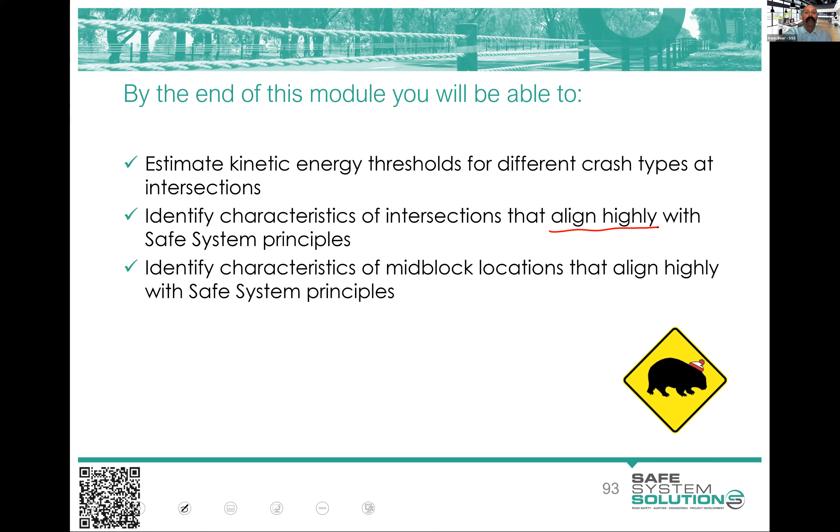Now there's a little term I'm using here which I want to touch on before we keep going. You'll notice I talk about aligns highly with safe system principles. I don't say is safe system or is not safe system. The reason for that is the safe system is sort of a spectrum, really - highly aligned with safe system principles, or very much not so well aligned. The reason for that is you will see as you do an assessment that things can be really pretty well aligned, but they're not perfect.

One of the big issues I've had over my time here is this initial entry of the safe system. People were talking about it like a binary thing. They would say, oh, we can't do that project, it's not safe system. And people would be like, well, yes it is. No, it's not. And then we had these debates. What we were sort of at was that it was something that was very well aligned with safe system principles but could be a little bit better, and then there was this debate, but they were talking about it as not safe system and safe system. And then we had people coming out with all sorts of things - we will only do safe system projects - and it was kind of slightly meaningless.

I definitely jumped onto taking advantage of this confusion a little bit when I left the Victorian Road Authority and started up Safe System Solutions, because of this desire to find these safe system solutions as such. A better, more accurate company name would have been highly aligned safe system features, but it doesn't sort of roll off the tongue as well. But anyway, I just thought I'd point that out.

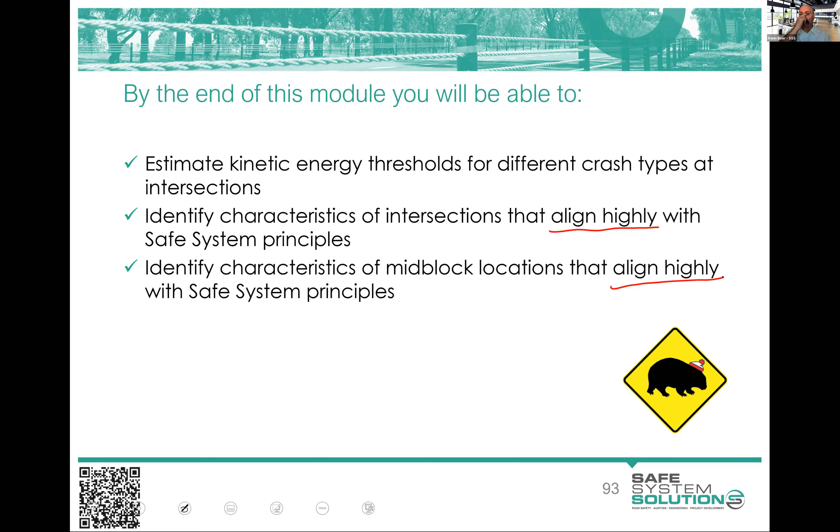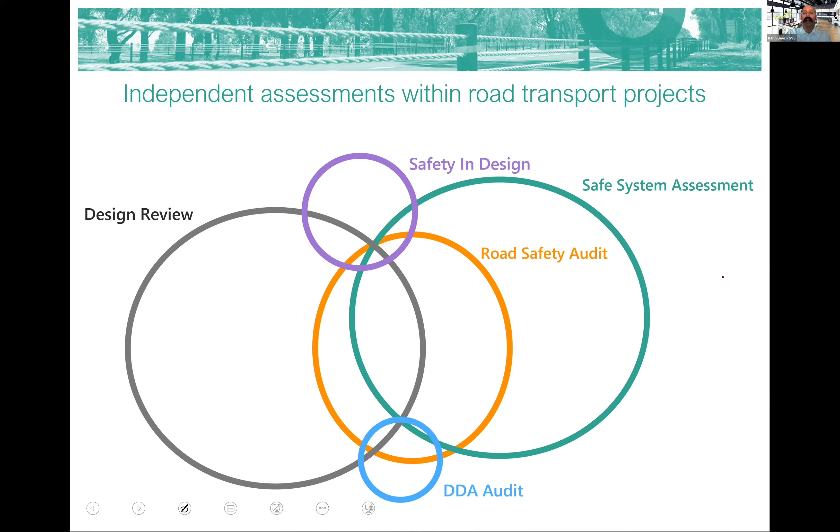We talked last time about the road safety audit, the design review, that independent design review, the safe system assessments, and the Safety In Design and DDA. So I won't go through that again, just to say that any of you that are currently road safety auditors, or you've done that sort of training, you'll be covering off some stuff you'll be quite comfortable with. But there are definitely things that are outside of that.

But let's start with intersections. Now intersections, obviously - well, maybe not obviously - intersections are a very direct point on the road network where risk spikes. And that's because obviously you've got conflict points, so you've got the ability for those crashes to happen. There's a few other little things that increase risk at intersections.

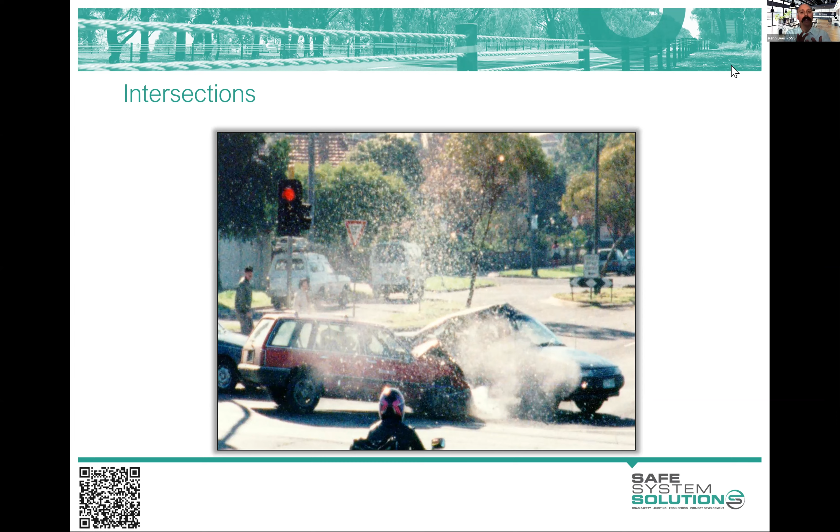There's often a lot of fixed hazards around intersections, which we don't think about too much. And often we're trying to - those are bottlenecks in the traffic flow - and so we're trying to widen and push as much through as possible in these locations, which means often space is compromised for potentially other road users apart from vehicles, or even vehicles themselves. So pedestrians, cyclists, motorcyclists can sometimes be slightly compromised in these situations.

Monash University Accident Research Centre in 2010, as part of the baseline research work they were doing on intersections, came up with these initial principles for intersection design. Some of that's fairly common sense, or some people think a little bit out of their control, but let's have a look at these.

The first thing they're saying is, can we get fewer vehicles? It's a slightly different take on the way we look at road safety, but very legitimate. That would change the exposure to crashes, because there's fewer people exposed, be that pedestrians exposed to fewer crashes from vehicles or vehicle-to-vehicle crashes. Fewer intersections, again, changes the exposure there - we're lessening the exposure to crashes because there's fewer actual conflict points out there.

Now, you may be saying, well, if you make it fewer intersections, people still need to get out and get to where they're going. So maybe we're just pushing all of that traffic to another intersection. And that's absolutely the case often. But if you can be pushing it to a safer intersection, that's a very good thing.

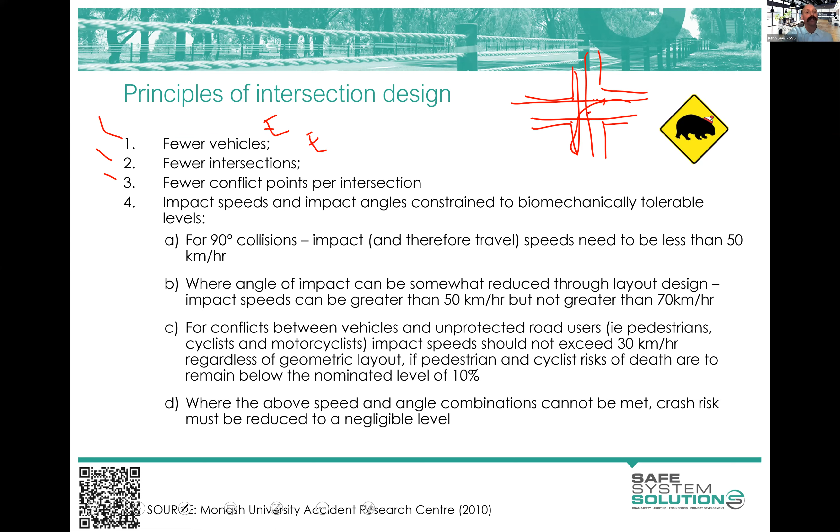Once you've gone through that, then you're starting to look at what are the impact speeds and angles and the biomechanical tolerable levels, which we've been talking about last module, and are we meeting these thresholds? So for vehicle-to-vehicle crashes at 90 degrees, are we at 50 kilometers per hour or less? So are these right angle crashes going to happen at less than 50 kilometers an hour? Where you can get a bit more angle on that crash, it can sort of go up a bit.

Now, the reasons for that are twofold. If you can crash at a bit of this angle, it's more of a bouncing off type thing - a bit of old vectors from physics, but you sort of bounce off. Your energy is dissipated into the environment rather than directly into that other vehicle. And likewise, if you can move it to a bit more head-on in terms of the angle, then you're engaging some of those frontal vehicle features that we know are quite powerful in terms of airbags, seat belts, crumple zones, the front of the vehicle. So if you can do that, we're somewhere between 50 to 70, maybe around the 60 kilometer an hour mark - within just on our borders of tolerable levels.

So pedestrians, cyclists and motorcyclists, we really can't be going above 30 kilometers per hour. That's our threshold speed. Often we want to see vehicle speeds lower than that, but we have that as a benchmark threshold speed.

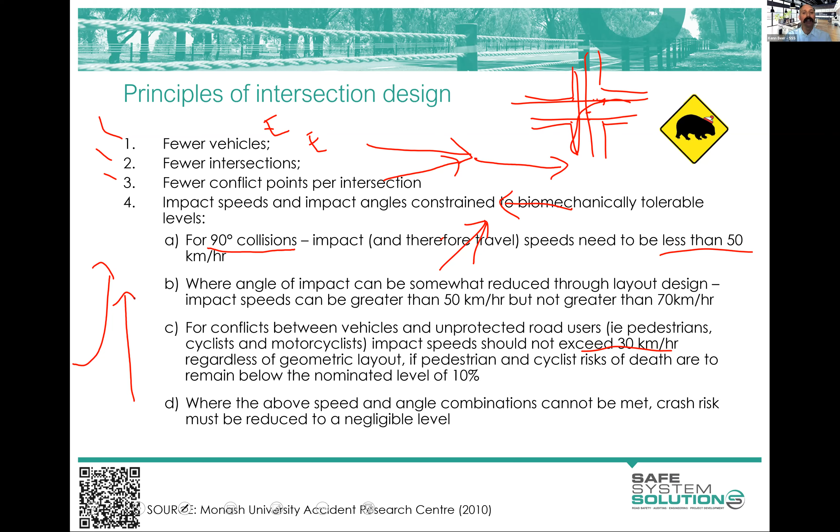And that's how on-ramps on freeways work. So the initial crashes on on-ramps on freeways are very safe crashes because the energy transfer to the human is so low. Yes, you need to think about secondary crashes, where they're going to go after that, any rear end crashes that result after people slow down and stop and the like. But in terms of that initial crash, that's quite within tolerable levels.

And so I have lots of these different diagrams, tables and things that pop up just to keep you calibrated in terms of what's survivable generally and what's not survivable generally for different crash types. And there are some tools and models available.

One of them is KEMM or KEMM-X, which is the kinetic energy management model. This is a particular bit of software that you could use to analyze an intersection in minute detail about the forces, the kinetic energy, the vehicles, the masses and the like. This is far beyond what you would need to do in a safe system assessment - it's so detailed, you don't need to go into that. You just generally have a look at the speeds, the angles crashes can happen, the mass of the vehicles going through, and you make a judgment call within a safe system assessment based on that information.

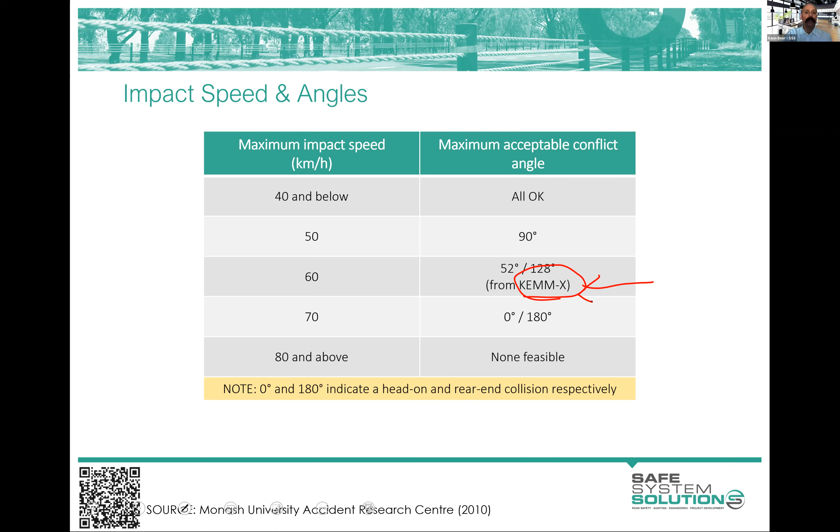You could be precise about getting the angles of crashes that could happen if you wanted, or you could just have a general feel for it and say, okay, we've got vehicles coming out here. That's about a 90-degree crash, and there's more angle on that one, so that's somewhere in between. I know the 90-degree one, about 50 kilometers an hour is the threshold. The other side of the road, probably about 60, because if they crash as they're turning out, that's a much more friendly crash, and you're starting to get a bit of a feel for it.

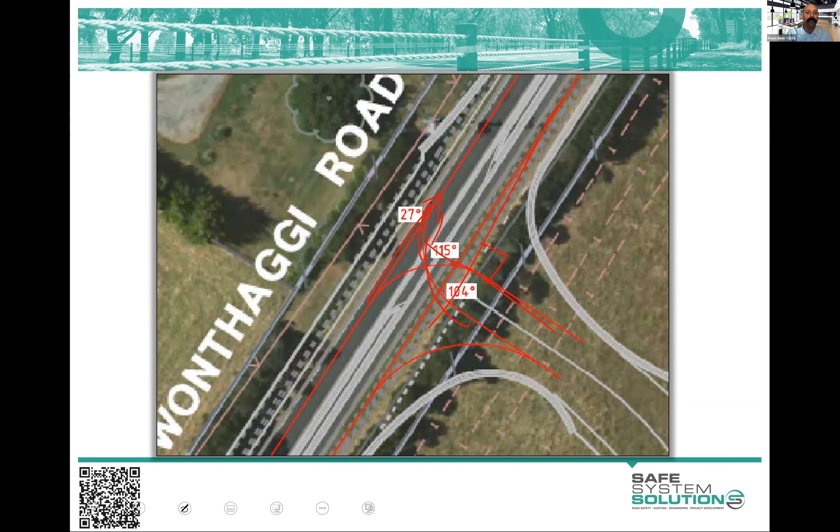The secondary crash risk that I mentioned is also important. When vehicles crash at an intersection, the mass of vehicles will move, obviously, the physics of it. But you also have vehicles that come in and maybe clip the front of the vehicle and spin off, clip the back of the vehicle and spin off, or avoid the vehicle that's pulled out and leave the road.

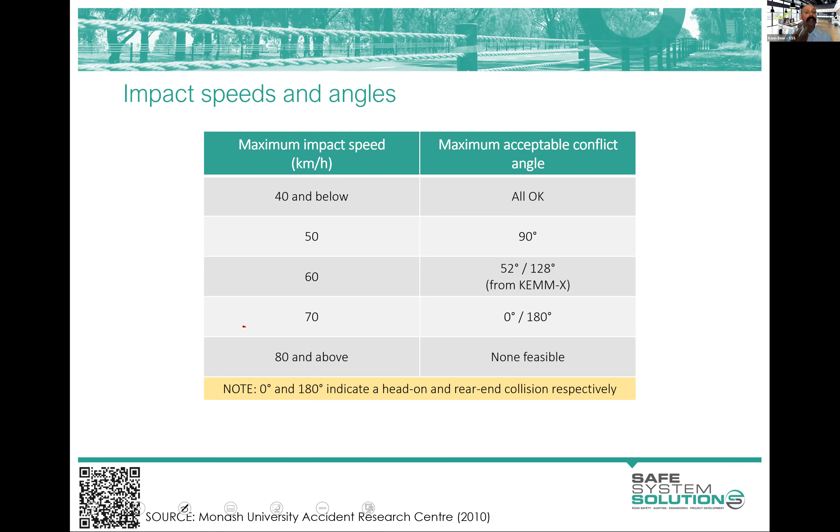So do start thinking back to these. For vehicle-to-vehicle impacts, 40 is all okay, 50 is fine, 90 is our sort of absolute limit with more angle on it. You can go up to the 60. 70 is really our rear ends and head-on direct crashes. It's very hard to run anything above 80 if that's the change in speed.

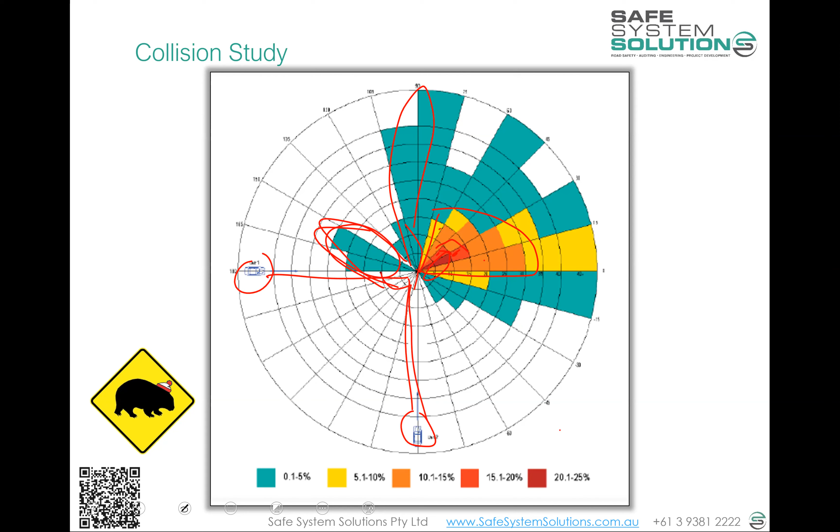If that makes sense. On that, when you realign the axes of the vehicles crashing - so like these ones, for example, they would be somehow... this vehicle's clipped off and run that way, or avoided out that way and struck there.

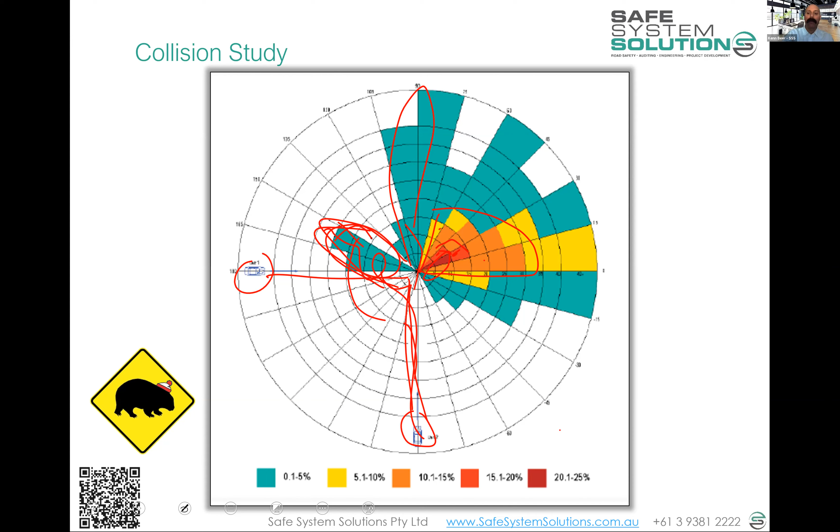Any other questions? No, not at the moment. Thank you, keep them coming in. Don't count the wombat again. Oops, oopsies. Oh yeah, okay, so if we go back to a slide, yeah, don't count it again. Just count the original time we get there. Uh-oh, what have I done now?

Okay, let's keep going. Well, actually, let's get you doing something for a Friday morning/afternoon, depending on where you are. I'm going to give you a little exercise to do here, and it's all about redesigning an intersection to get higher alignment with safe system principles. And this is our intersection. Let me give you a bit of background info about it.

This is a major arterial highway. It carries 20,000... oh, lost it, sorry, bear with me. What the hell did I do that for? Okay.

Okay, 20,000 vehicles a day, and at 10% commercial vehicles, so quite an arterial road happening there. We've got a side road here, and it has 1,200 vehicles a day, so lower, and it just takes the rubbish trucks. It does have occasional buses going down there because there's a school down the road here, about 400 meters down the road. There's a bus stop here because this is a bus route as well.

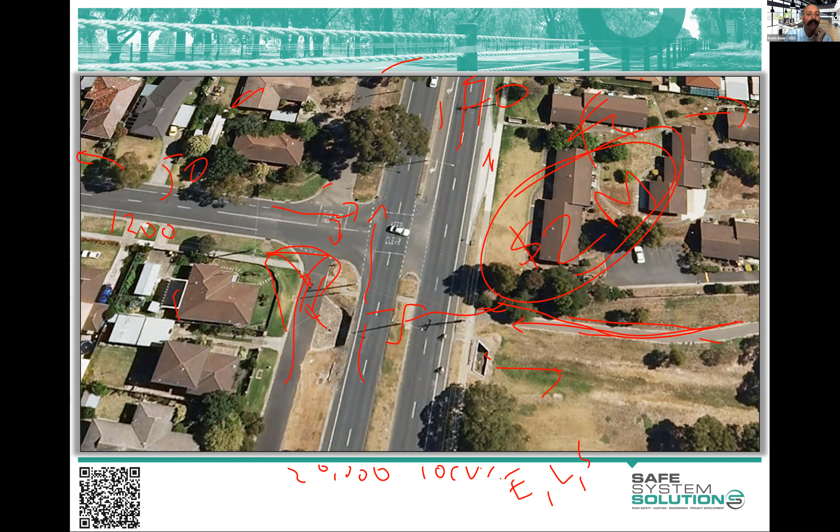Okay, good. What about a price for an offset roundabout? I might need a little bit more detail as to what the person means by an offset roundabout—are they meaning a different shaped roundabout, like an elongated roundabout, or are they talking about taking a full-size roundabout and just offsetting it? Maybe just type in a little bit more detail on that, please.

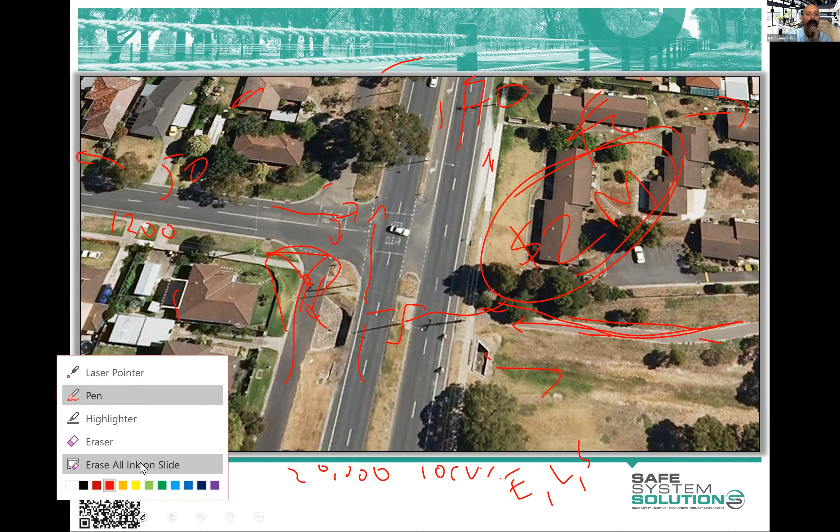How tall is the drainage underpass? I like whoever's asking that question, give them a prize just for the fact that I like where they're thinking. It's only a metre high. It looks high from up here, but it's actually only a metre high—it's quite wide.

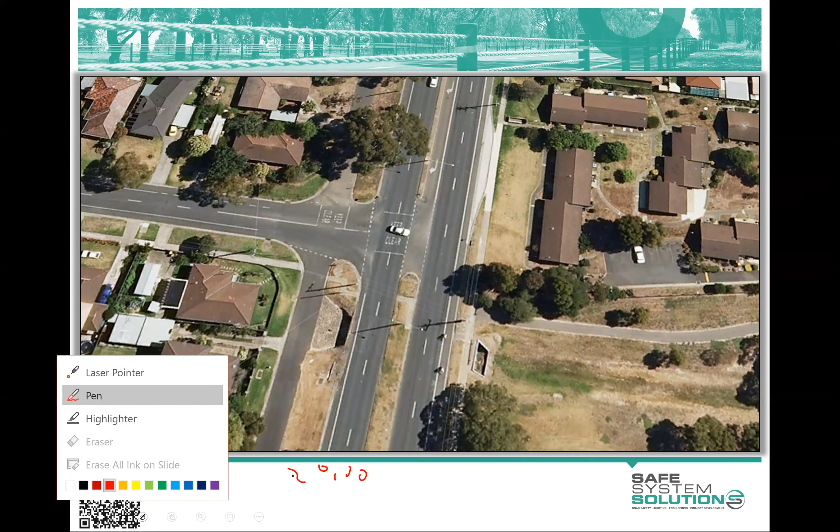Okay, so if we can get some more info on the offset roundabout. Assuming north is top of the plan, the southbound movement does not need to use the roundabout but caters for all other movements. Oh okay, yep, I see what you're saying—essentially have that unimpeded, and then they would merge in from this side.

That's going to cost 5.5 million. It actually got more expensive by doing that, because we basically now have to fully buy that house and that house in order to fit that in, and still have to move some of this. Okay, cool idea.

Cost for extending the drainage culvert, and are there any constraints with changing operation to signalised intersections? That's all in the work. No, you can extend the culvert no worries, and it's $100,000 to do that, and it's not going to impact on any of the intersection signalisation or anything like that.

Can the drain be converted feasibly to allow an underpass for bike and foot traffic? Yep, it could be. It costs you another 700,000 to do that.

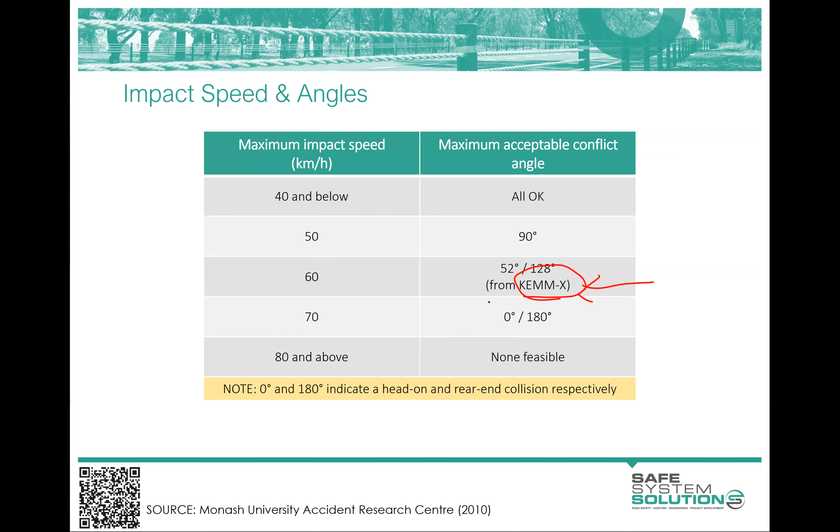Going backwards, okay. Can I get an approximate line of the right of way at the right-hand side of the image? On the right hand, oh yeah right, okay no worries. Approximate, maybe a little bit in from that. I've taken a little bit of there, but yeah, there's a bit of road reserve to play with.

What is the cost for traffic lights and an over-the-road footbridge? 3.7 million. That's out of budget. Okay, how much would it cost to move the bus stop? 200,000.

Have there been crashes with vulnerable road users? No.

What would be the cost of a compact roundabout? Depending on how you designed it, between 1.5 and 2.1 million.

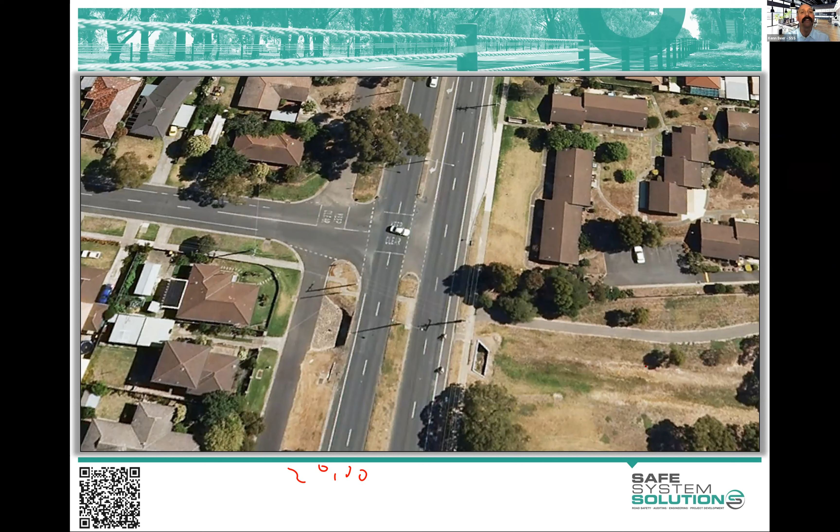People are still crossing at grade because why would they walk an extra 300 meters just to get where they want to go? So be careful and target those, but it's all about the intricacies of the design. It would influence exposure if people use it.

Same with the utilization of the structure here to go under. It's interesting how this plays out, by the commentary that was happening there. Somebody said, can we utilize this existing structure to put pedestrians and cyclists under? And somebody else came back and said, can't do that, it's not safe.

This always fascinates me. I've been involved in these projects and they're brilliant. They've been slightly different to this configuration, but we have a massive amount of infrastructure there that's being utilized only a small period of our time. It can be a very good asset. It needs a bit of work and design and the like, but it could provide a really wonderful facility.

Now, I appreciate that people get quite nervous about this idea that pedestrians, cyclists, and this area could flood. Well, we could put in place measures to ensure that doesn't happen. I don't think people would go in there if it's starting to flood, but you need to be careful. There is a personal safety concern of long, dark tunnels like this, which you often need to work through. Potentially, we could have a little air opening there or something. But there's a bit to it.

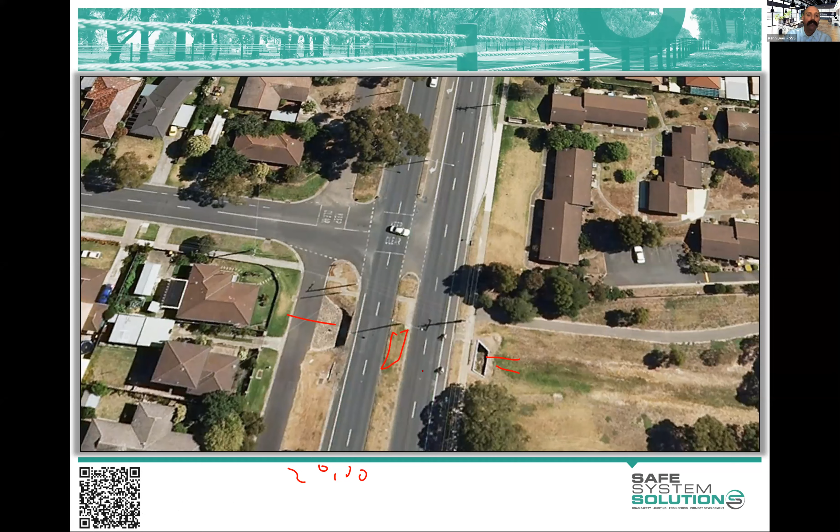Okay, so let's move forward here. We did have a lot of people who wanted to signalize this intersection. And I sympathize, or I don't sympathize - I know why people were wanting that. There's a lot in this intersection that says signalize it from a way of operating.

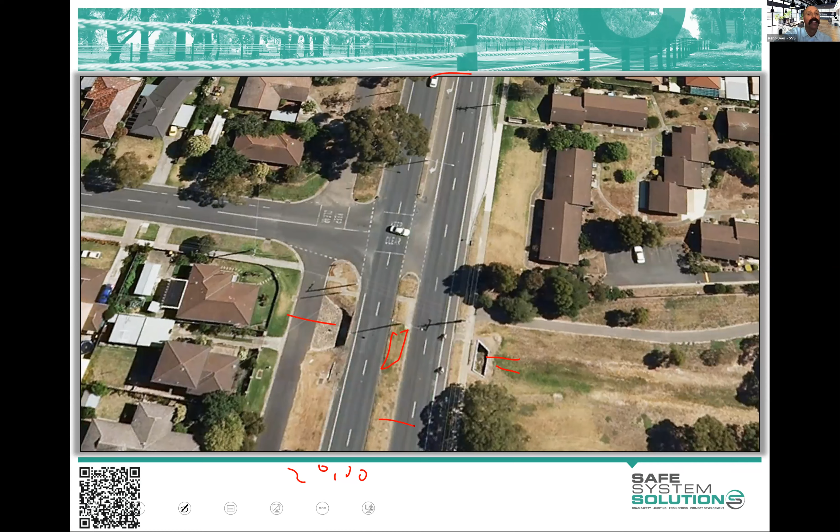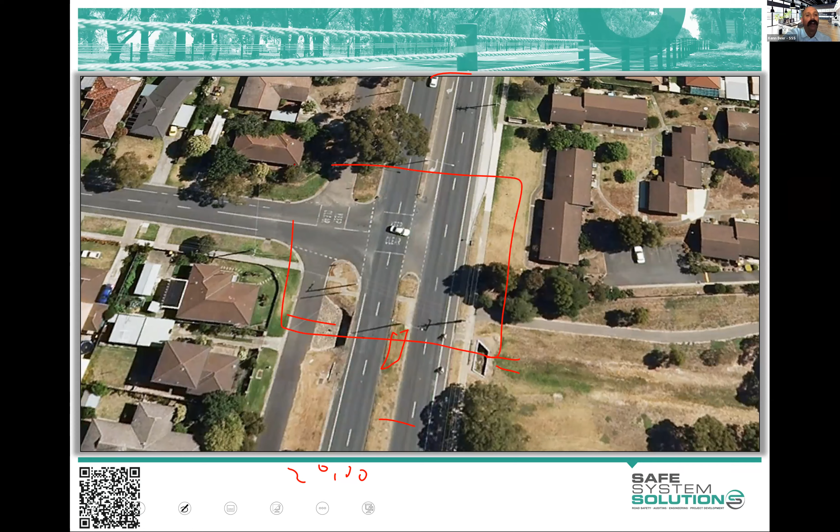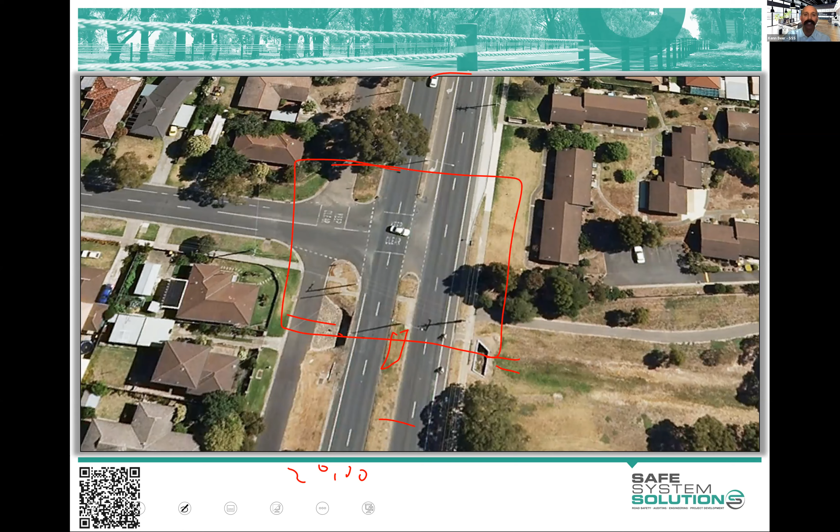The signals upstream, the signals downstream, so continuity of signalization. The unbalanced flow that we talked about is another reason why signalization becomes sort of a preferred option. The land, the services, the structures - it actually kind of looks like it's been set up a little bit for signalization at some point in the future. Everything's sort of saying signalization.

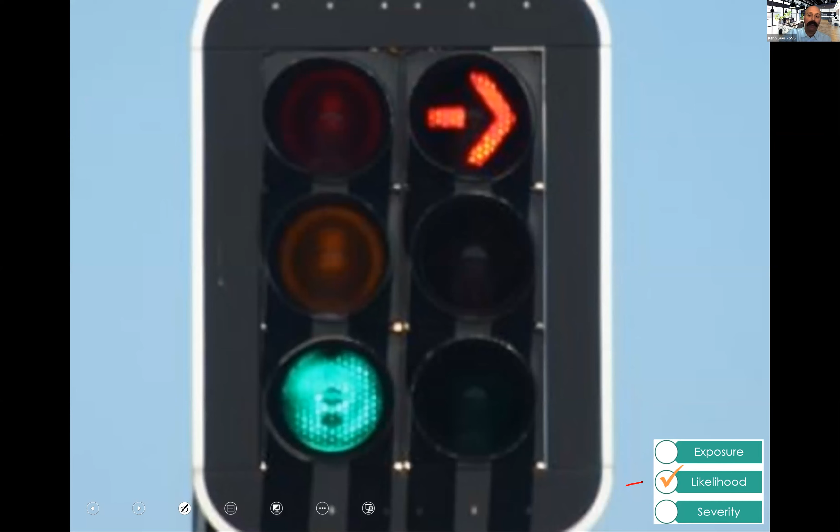And signalization, we know, is going to reduce the likelihood of crashes. And well done for those who popped that in. But what are we doing for the severity? And in fact, signalization is an interesting one.

That's pretty scary, isn't it? And you might be saying to yourself, well, why do we get the attention on different ones? And the reason is that by the time we've got to signalization of an intersection, people sort of go, well, we've done everything we can.

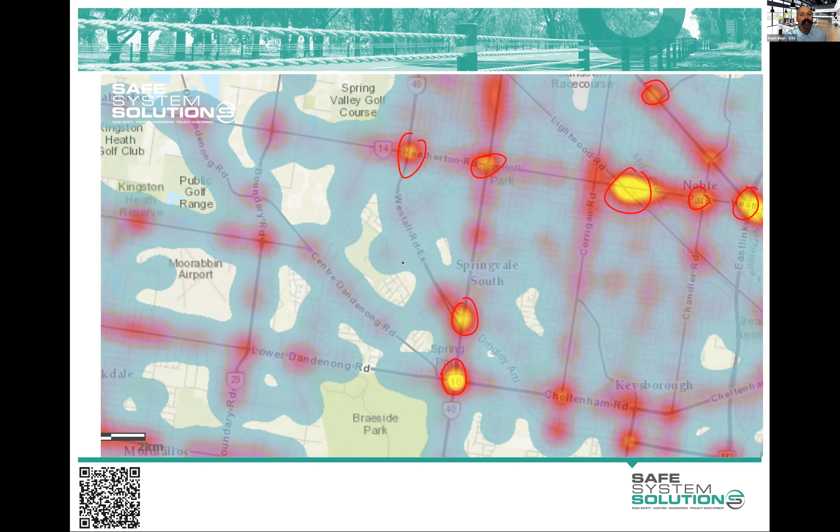When people rightly pointed out that we were addressing the likelihood of crashes, people were then saying, well, I want a roundabout because it's going to address the severity of crashes. Why? Because people drive up to a roundabout and slow down, the angle of crashes is better, and you get better safety outcomes for passenger vehicles, which are our big concern at that intersection. We might have to think about how we're going to get pedestrians and cyclists through, but this will certainly help. Now, maybe it's not one or the other.

But the challenge with roundabouts, as to why they wouldn't be used all the time, is that they don't get as much traffic through as quickly. There are also some challenges with bikes and pedestrians in terms of permeability. Safety-wise, cyclists don't seem to fare too well at roundabouts. Pedestrians—I'm still waiting for anybody with really poignant research to show they're at more risk at roundabouts. I know they don't like them, there's research around that and they avoid them, but actual risk is another matter.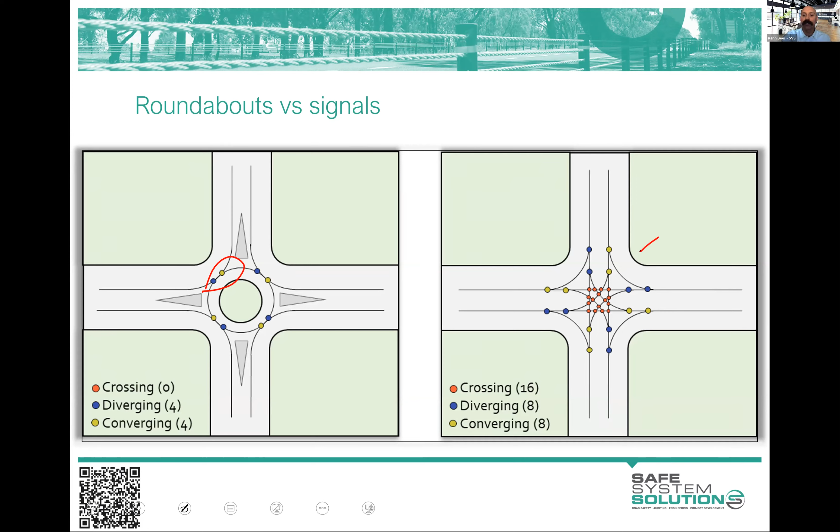The angles are better. This one is basically saying that as you drive along, people drive in all sorts of states of consciousness - half asleep, some slightly intoxicated, thinking about a fight they've had with their partner, whatever it is. They're zoned out completely.

And if you put a set of traffic signals there, some of them just drive straight through the red. Some of you have probably done it and gone, I just ran through a red light.

That often happens with pedestrian operated signals as well. But if you put a big roundabout, a big lump of infrastructure in the middle of the road, they wake up, they come back to reality and they slow down. It's an amazing feature to get that engagement with the drivers. So that's a huge win already - roundabouts provide some wonderful, wonderful features.

Now, Kathy, I'll pause there and see if any questions have come in at this stage before I keep going through some other ideas on treatments at this intersection.

Absolutely, questions have come in, Ken. So earlier on, when you were talking about signalised intersections, is it a chicken and egg? Are they signalised because of the high volumes?

Yeah, you've got a really good point - prize for that person actually, because I do like to make a sort of story of it, but they are higher risk due to the volumes. High volume immediately gets you higher risk, doesn't it? And you signalize it because of that volume and maybe danger.

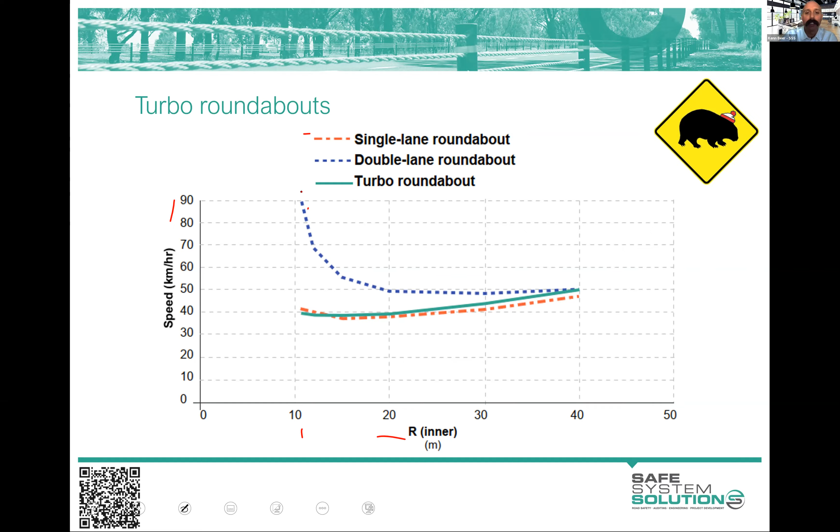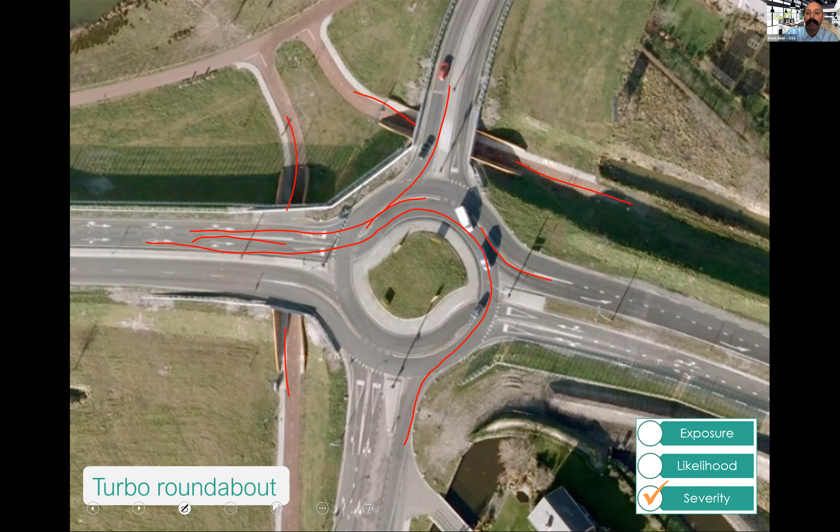A turbo roundabout basically has a raised separator on the approach and a raised separator within the circulating carriageway. So if you want to turn right, you get in the right lane, get into the middle part, come around and go out. To go straight, you can do it from either lane. To go left, you've got to be in the left lane and go out. Like the cycle facilities here, it's pretty nice. But anyway, here's another turbo roundabout.

What I also like about this aerial image is the conflict happening here and the angle of that. We know that the vehicles have slowed down - the white vehicle would have slowed down and the others made this mistake and entered the intersection. If the crash was going to happen, it would be a shallow angle, low speed - it's going to be safe, right? Same mistake by an old truck driver here. If they had pulled out at a signalised intersection, or run the red, it would have been high speed, bad angle, or even with give-way control.

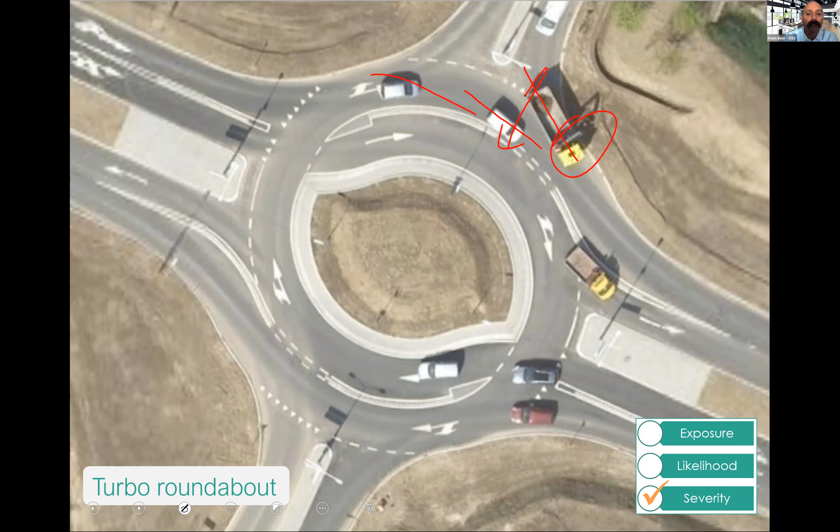Turbo roundabouts can be pretty big. Here's another one out of the Netherlands, and I was talking to a Dutch engineer about this intersection. I said, this just fascinates me - I've not seen it live, but I've seen this. I was saying, in Australia, or probably New Zealand as well, this would either be a grade separated interchange, or a large signalised intersection. The response from the Dutch engineer was, oh, but what about all the death and serious injury? And I was like, yeah, it just appears to be accepted.

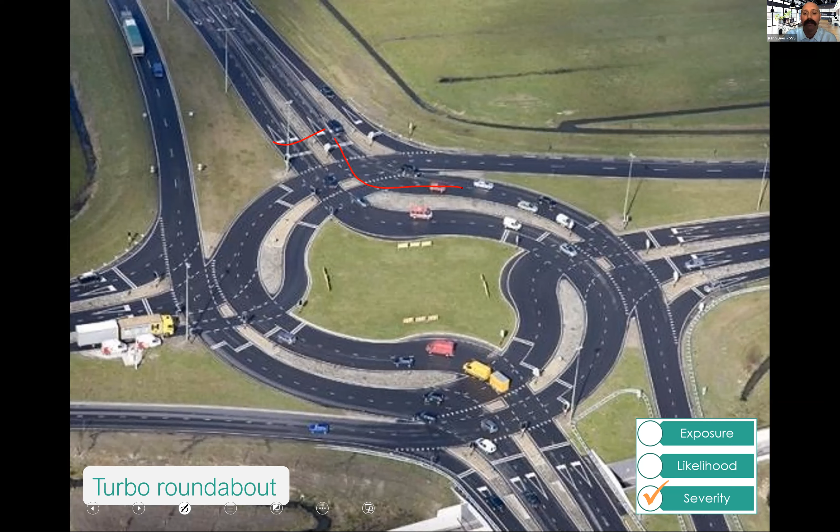I'm just going to pause there, Kathy, because this sparked an idea for me to try and dig something out of an archive that I've got. I'm just actually not sure where it would be. Anyway, any questions come up at this stage?

There was a question earlier about doing a raised platform at that previous signalised intersection. Can you have a raised speed control device in a 70 km/h zone? Yeah, absolutely. Not traditionally, but there's lots of stuff now emerging showing that you can. We're going to share an Austroads report that recently came out on raised safety platforms, and there's pretty exciting stuff in there.

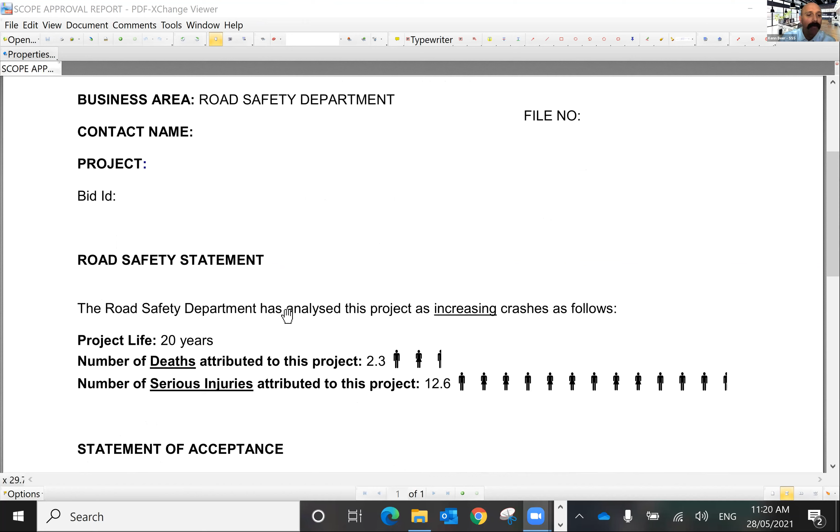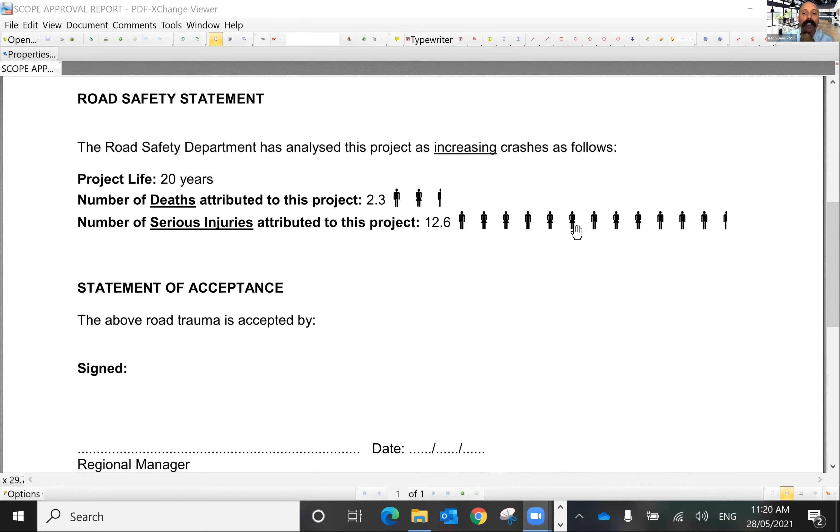So I started producing this memo. This was the template: from the road safety department. Road safety statement: the road safety department has analysed this project as increasing crashes as follows. Project life, 20 years. Number of deaths attributed to this project, 2.3 - I put little people there to remind them we're killing people here. Number of serious injuries attributed to this project, 12.6. And a statement of acceptance: the above road trauma is accepted by... and then I'd send it back and say, sign that off, regional manager, regional director.

Now this caused trouble, some controversy - I certainly got hauled into the executive director's office and told, you have to stop sending this. You're boiling a very complex task of managing a road system into some key things that aren't appropriate. We have a responsibility to think holistically, we've got to balance road safety with other transport objectives. And you sort of say, well, no, somebody's made a decision here. They've gone, we can get more capacity and throughput in this intersection, but we'll have to kill a few and seriously injure some of our community to do so. If that's a decision people are comfortable making, they can sign it off and we can have a different debate. But let's not hide from the fact, let's not pretend these signals will operate as safely as that roundabout.

A comment's just come in: no one from Transport for New South Wales ever signed that. Nobody from VicRoads ever signed it either, and it was just removed. I've kept a few copies of the unsigned ones.

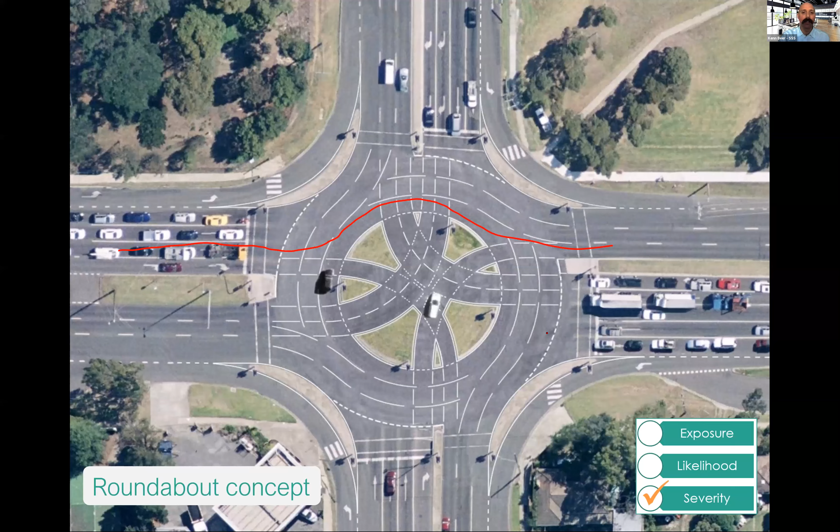Let's talk a little bit about those now. So raised safety platforms - for those wondering what that actually means - they're kind of like an urban speed hump, but the grades are less, and in fact you can alter the grade. So they're not like hitting a speed hump; you can actually navigate them quite gently if you're going at the appropriate speeds. Here's VicRoads' original ones - you can see it's a gentle raise.

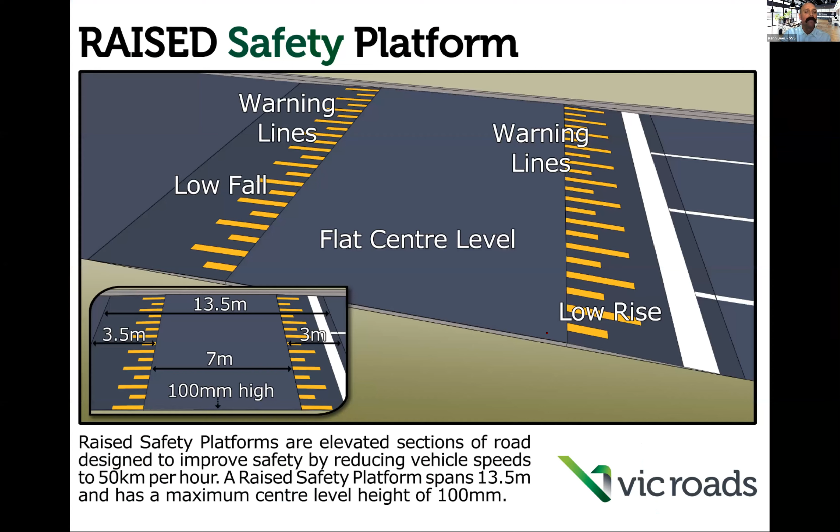That's actually what the region proposed at this intersection you're looking at. They said signals are the right answer for all of these reasons we talked about before, but they were not comfortable leaving bullet vehicle speeds so high at this 70.

And up the road are the signals, and those signals have had some serious injury crashes happen, as have the ones down the road. They know this, so they've taken a safe system analysis and said we need to get speeds down within these tolerable levels. They've come up with this artistic impression.

Now, a prize for the person who can tell me what speed they tried to design these to achieve. What speed? All right, so Sean gets a prize for 50.

Now why 50? Well, the predominant concern that the region had here was right angle crashes, vehicles coming out and going in, being struck by the bullet vehicle. We know that the tolerable threshold speed for right angle crashes between passenger vehicles was 50. You could go back to your tables and all that stuff I showed you. 50 is the speed they were targeting.

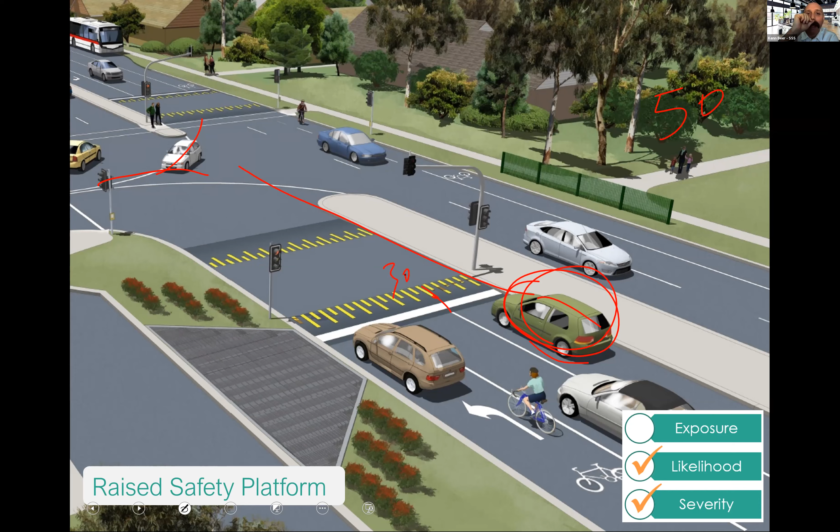Now look, they've not raised it through the whole intersection, because these vehicles coming out and going in, they're not the bullet vehicle. They're not the one that needs speed washed off. They're the target vehicle, this is where the energy is, not the one that's turning. These vehicles are the ones.

Now, there's some cyclist and pedestrian challenges here, but we'll ignore that until next module. We're talking lots about cyclists and pedestrians.

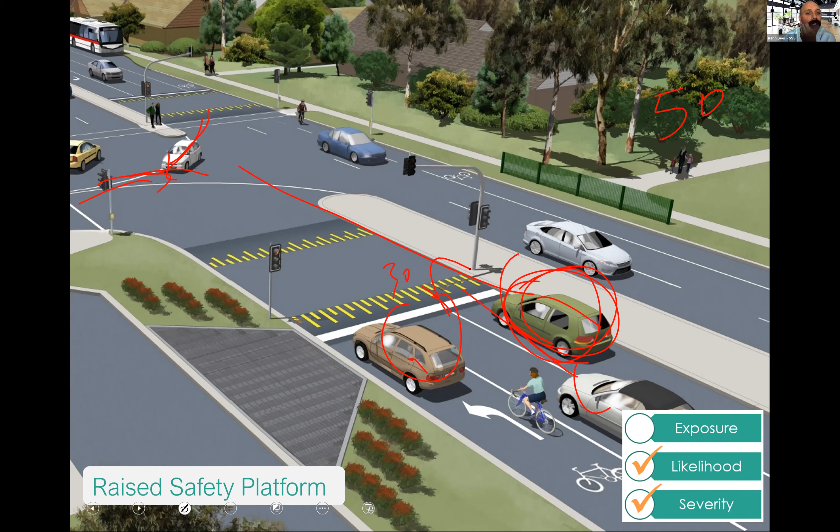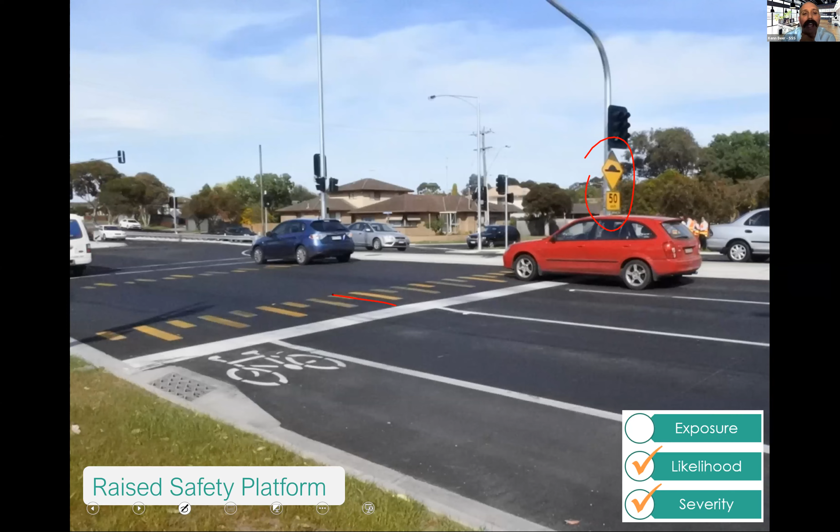Anyway, they built it, and there you go. Advisory speeds 50, shallow ramps just to wash that speed off. There it is, all right.

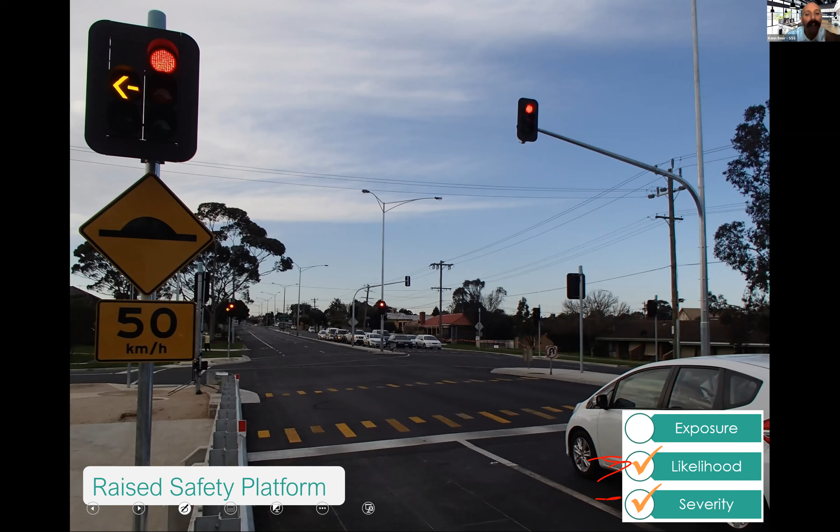And now we've addressed the likelihood of crashes through the signals and the severity by the raised platform, which quite a few of you were suggesting from the start.

Look at this, what a picture. Braking, slowing down, red light. Amazing. All right, so we've just brought signals into having something to engage with the driver to slow the vehicles to appropriate levels at that specific conflict point.

And actually, raising an intersection reduces your dilemma zone. The dilemma zone is the period in time and space when you see an orange light and you're in a dilemma, do I put the foot down or do I brake? I'm sure you've been in the dilemma zone. And what happens is, if you have a raised platform, it reduces your dilemma zone.

People are far more likely to hit the brakes, and that's a good thing for road safety. You don't like a large dilemma zone.

There's other things you can do as well. Yes, you have to think about other vehicles, but interestingly there's so much more research and evidence coming forward now to show this is not the end of the world for heavy vehicles, buses, motorcyclists, for others. There's so much fear of this without actually knowing it. We had people in the early ones of these saying you can't possibly do that, people will hit it, Dukes of Hazzard, flying off into the roadside.

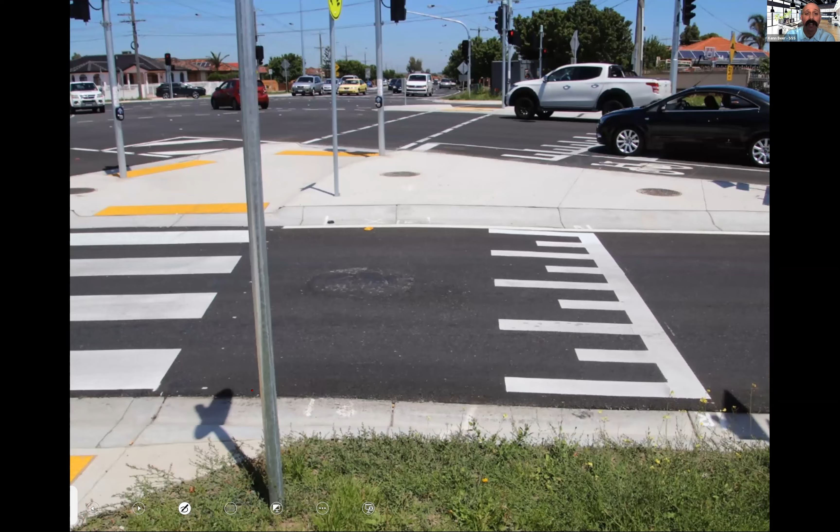That was Surf Coast Kidman Avenue, the first of the raised safety platforms on major arterials, carrying 20,000 vehicles a day. This one, Dalton Drive, carries 56,000 vehicles a day, including emergency vehicles, buses, and heavy vehicles, it's a major route.

So people get pretty scared about this in a lot of jurisdictions. It was the same when I started my engineering career, if I'd suggested a vertical deflection on an arterial highway, I would have been kicked out of the building. Engineers would have gone berserk, saying you can't do that. But we're in a very different world now.

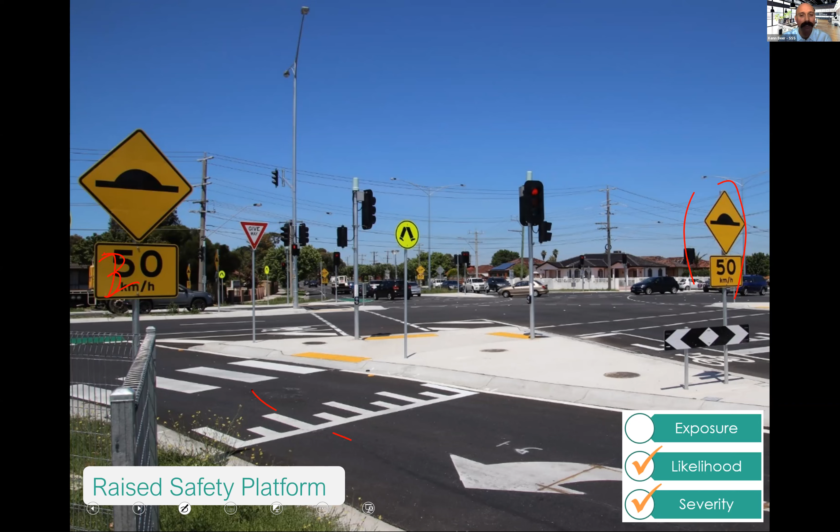There are design challenges with these things, so read those documents if you're interested. But the principle is so good: we need to slow vehicles through these highly dangerous conflict points where potential kinetic energy transfer is huge. I'm going to keep moving on, Catherine.

Again, the same sort of thinking applies at some of these other intersections. This one is a site with 100 km/h roads in both directions, where the arterial road goes around a corner. There's a Telstra Exchange building there, and the cost to move that was obscene.

To fit a full-size roundabout in here was so expensive, because you'd have to remove that building and acquire a heap of land, and it was all hard. So instead of just reverting to what would usually happen, like a right turn lane, more rumble strips on the approach, or an active warning sign, which would all reduce the likelihood of crashes, we've got to get that severity of crash down.

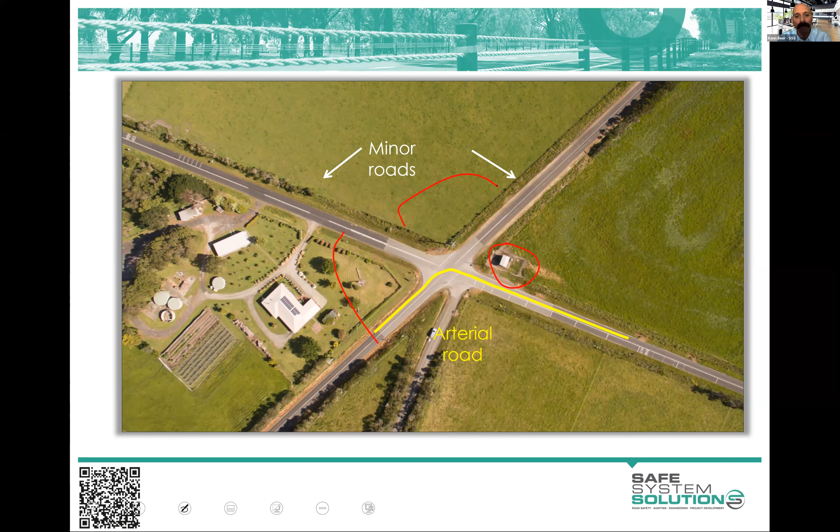So in this case they came up with a compact roundabout. This is a decently major arterial road, not as big as some we were just talking about, down in the Gippsland area. I'm sure John Ernst knows this one.

Again, they haven't used the deflection or reverse curves you'd usually have on the approach to a roundabout to slow vehicles down. Instead, they've gone with raised platforms, and these are shallow raised, with a small roundabout in the middle and a big concrete apron around it.

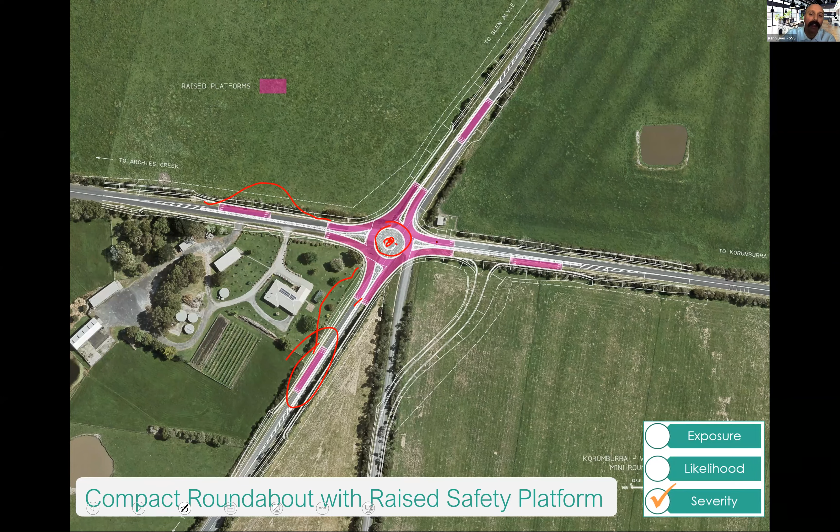That gives large vehicles the ability to sweep around there. So that one has also been built, and you can see there the vehicles slowing on the approach, raising up, slowing down. You can see the little roundabout in the middle and the big concrete apron, so large vehicles can sweep around.

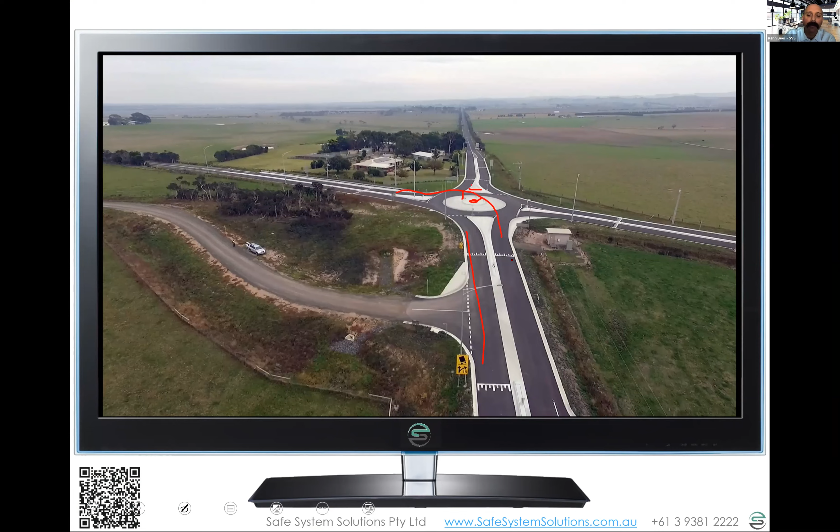Let's do a little quiz, Kathy, and then I better hurry up and move things along. Hopefully a quiz will pop up on your screen shortly. True or false: traffic signals are not safe system. True, false, or unintelligible question - meaning it doesn't make much sense the way it's been written.

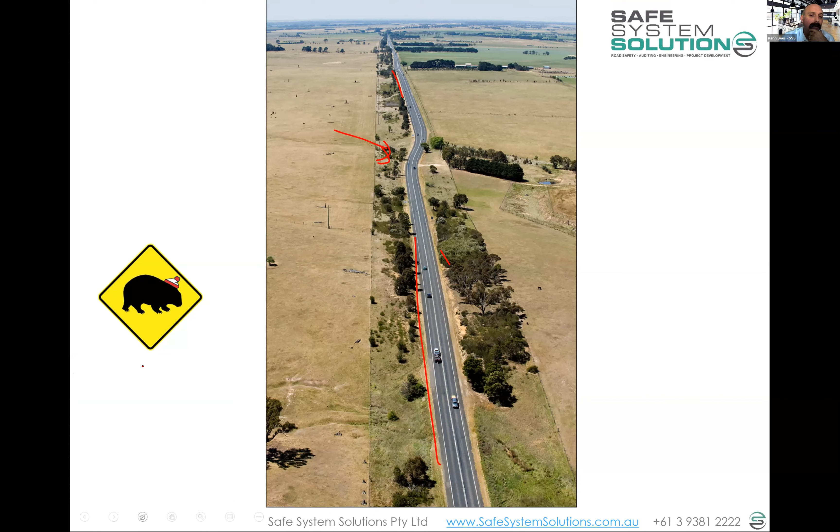And the crash mechanics of a driver on these roads that falls asleep is quite interesting. Usually a driver's driving along, falls asleep, and slowly drifts off to the left. I haven't drawn that very well. They just drift off to the left, because of drainage the road sort of slowly moves them over to the left.

Now often people think, oh, then they just hit a tree. Well, no, that tends to not be what happens. They tend to wake up at some point as they're hitting an unsealed shoulder or the roadside bit, and yank the wheel back to get back on the road. As you would - you're driving along at 100, 110 kilometres an hour and you're not on the road, or you're heading towards trees. That's how you wake up. Yank the wheel back, or you're distracted and you turn back and oh my God, right?

And then you can start to get yawing. Yawing is as the vehicle starts to slide, right? And this is where we say all hell breaks loose. Some vehicles at that point keep sliding and hit a tree. Some regain traction, shoot across the road, head-on crash. Some get to the other side of the road. Some go back onto the road and then overcorrect again - what we call a double yaw crash. So they've yawed one way and they yaw the other way, and then they'll go back out. There's this huge variety of things that happen, but they often start with that gentle drift off.

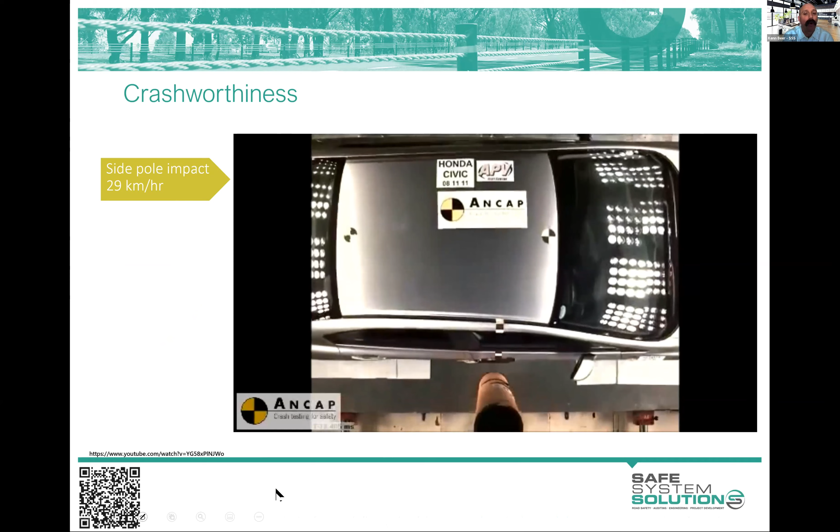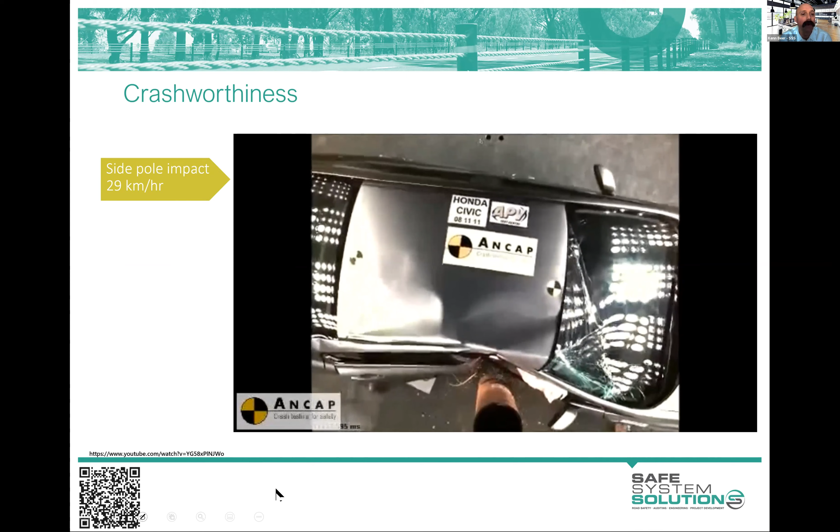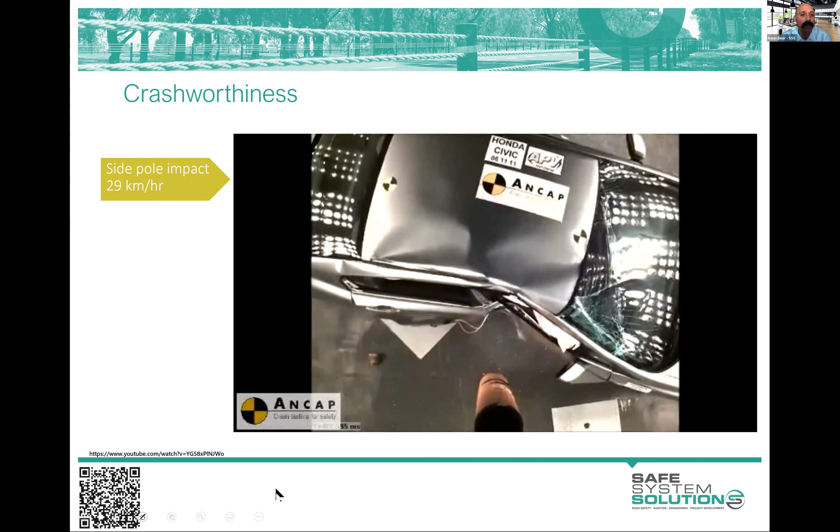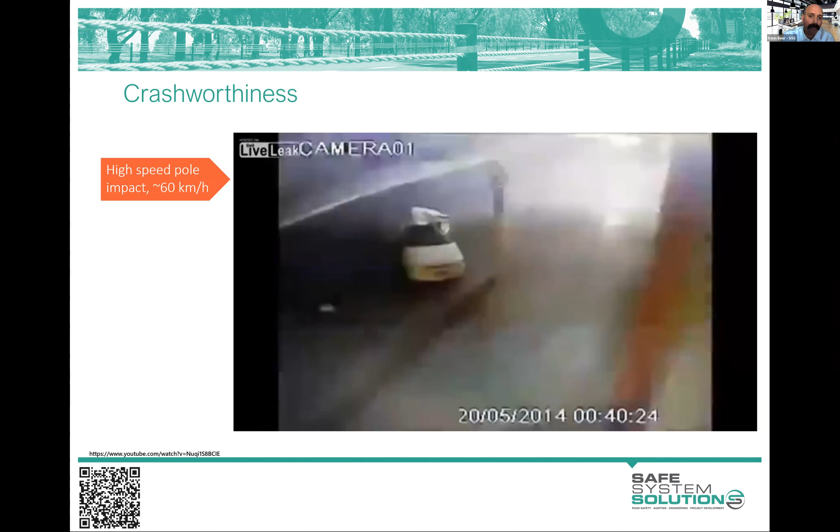So you can see the violence in that crash, and this is predicted at 60 kilometres per hour. It just obliterates the vehicle. So a point source hazard - that's a tree, a power pole, or the like - it just imparts huge amounts of energy to specific points. And there's a bit of a tendency of a passenger vehicle to wrap around it, as this one has, the head drawn to the solid object, but hugely violent events.

But clearing all those point source hazards doesn't necessarily give us a completely safe situation. This is some research that was done, run-off road casualty crashes per 100 million VKT - prize for the first person to write in what VKT stands for.

So runoff road casualty crashes, and you'll see that this is clear zone, right? Clear zone being an area free of point source fixed hazards.

So Sarah got in there for prize, Kathy, with vehicle kilometres travelled. So this sort of brings it back to an exposure metric that we can compare. So this is crashes per vehicle exposed to that crash. It's a nice way you can compare road to road by VKTs because it takes volume out of it.

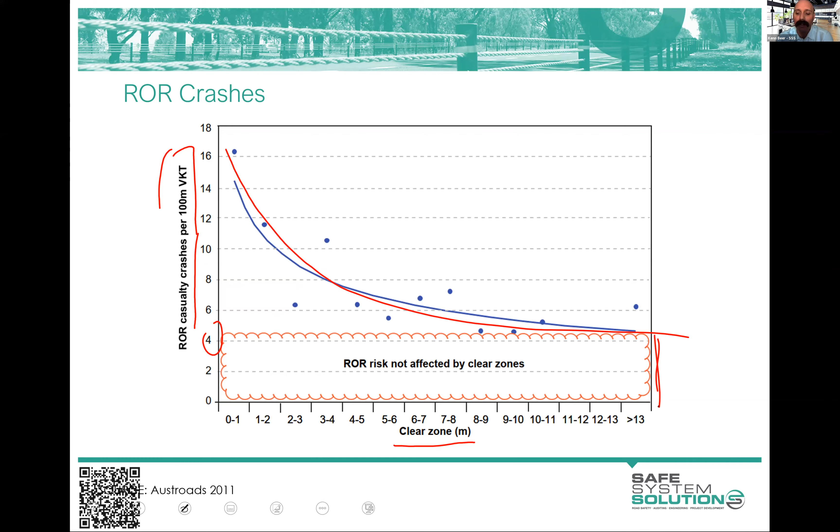So the idea of a clear zone or just clearing your roadside of hazards is not necessarily a safe place to be, because vehicles go beyond it or they roll over.

And so probably maybe 15 or 10 years ago, you would have said, well, we've got nothing better, right? Because we can put some guardrail in, but it's got some challenges, it's something for people to hit. And it'd be safer to provide these cleared areas.

Well, barrier technology has just gone off the charts. It's amazing how good these barriers are engineered and designed now for this. And it's actually now a friendlier thing, as crazy as this sounds, to have a barrier at between 4 and 6 meters off the edge line than it is to provide a cleared area back 15 meters.

Because that 15 meters of cleared area provides the vehicle chance to roll over and have crashes there or go beyond that. So it's slightly counterintuitive to a lot of people, but it is higher aligned with safe system principles to have that continuous barrier system.

Certainly for most roads where passenger vehicle risk of run-off road crashes is our biggest concern, and they are by far our biggest run-off road representation of passenger vehicles.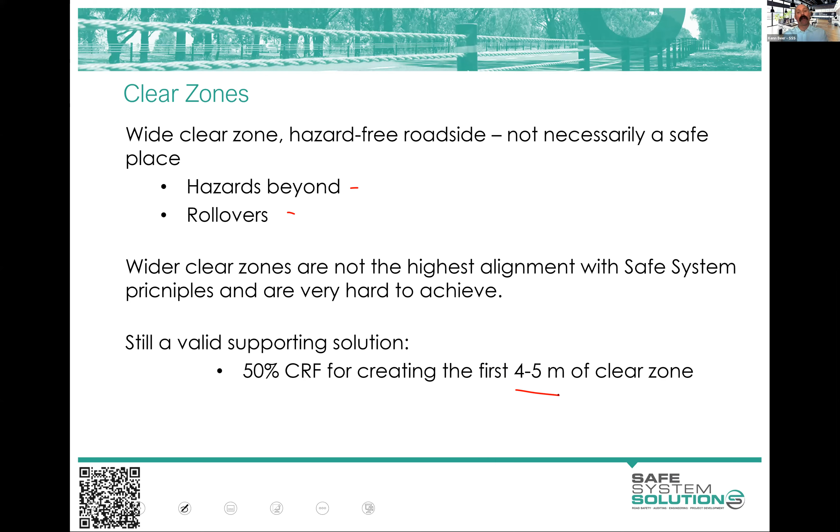Interestingly, about within a year ago, this is how the Austroads Guide to Road Design Part 6 was telling us to basically design a new road. Maybe you'd want to remove that, but big cleared area, separation of carriageways, big sealed shoulder, 3.5 metre wide lanes.

Audio tactile - wow, these are truck rumble strips. We just did a little safe system snippet on those. So that's probably not in the Austroads Guide. They were. And trees at your clear zone.

Now, this is the Hume Freeway, Benalla Bypass, built whatever it was 20 years ago or something like that. But there's a huge amount of death and serious injury along here. People are leaving the road, making it to the other carriageway, hitting vehicles, running off the road, hitting trees.

All right, and you sort of think, wow, even within a year ago, we would have designed a new road like that. And it really, it's just so sad to see.

We build billions of dollars on new roads and build a median like this, maybe even narrower, nothing in the middle. And then within 6 months of it opening, a vehicle goes straight across and hits another vehicle, kills a family.

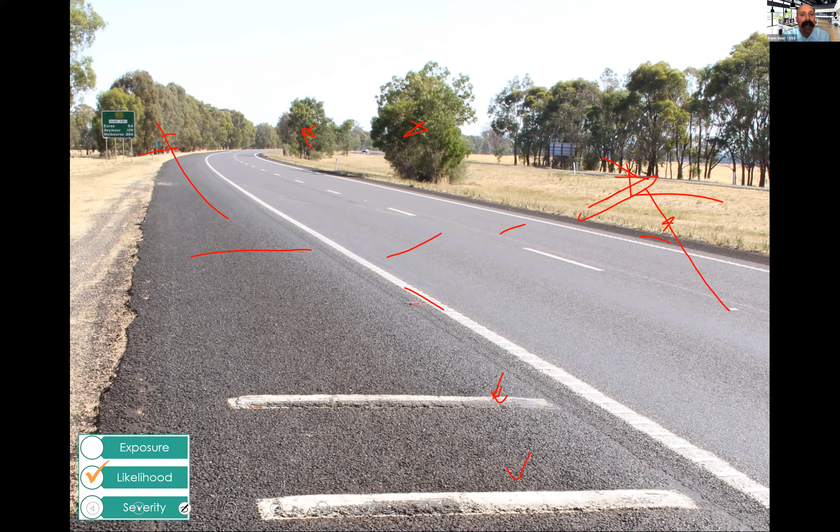That's happening out there. Imagine if you built a new multi-billion-dollar train line, and within that time, a family was killed on it. There'd be absolute outrage.

Anyway, the new part. Yep. Sorry, what about sand traps?

Yeah, so I did coordinate a study on use of vegetation and use of different surfacing treatments in run-out areas, because it can work well on a racetrack and those sorts of things. In theory, it can be done, but the big actual practical application challenge of it is the maintenance of these features, because over time they'll get hard and they won't operate in that way.

Same with vegetation; it'll either grow or you get different species. There are some vegetations that show potential for that.

You've got to think about motorcyclists as well, heavy vehicles, how does it all work. So it's quite a complicated beast. I mean, yes, you could do it, but it would need the investment as well with some extra stuff. Also, the rollover risk still is a little bit present in some of that.

The new Part 6A is interesting. It does a good job in moving us a bit forward. Have a read of that if you're in the space.

But here's a little diagram we whipped up to sort of show alignment with safe system principles - high alignment with safe system principles, low alignment with safe system principles. And we're seeing full containment, barrier system, barrier system, barrier system.

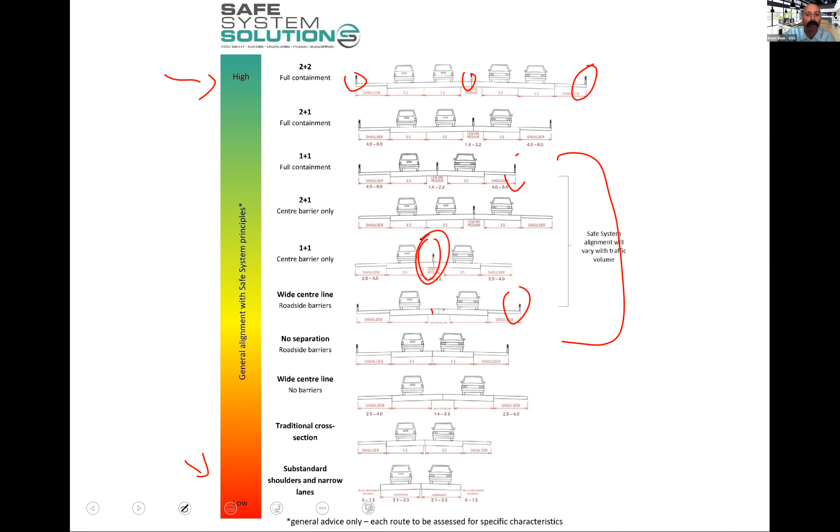And down to, obviously not separated. Now there's a bit of interestingness in the middle here with, do you go wide? Is it better to have a central barrier or outer barriers? There's research from a few different places in New Zealand showing somewhere around between 4,000 and 6,000 AADT, it's actually a better investment, once you're above that, to put a central barrier system. If you're below that, to have outer barrier systems. But ideally, we would be up in having both.

And then there's lots of cross sections out there, but I do like this one. I thought it was pretty good and worthy of showing, because it actually puts a star rating there as well. It says this is a 4-star road, so it's pretty good. It's got this big median, and it's got some roadside, and it's got 2 lanes in each direction. But this is 5-star, right? When you've got the flexible barrier system in the middle, and you've got the barrier system, and you've got the barrier system, right? That's 5-star.

And look at the land take, it's not going to be cheap. It would likely be a lot cheaper to build a new road like this than it would like this, because you wouldn't have to buy a whole lot of land. Well, potentially, that'd be case specific, obviously. So achieving our highest alignment with safe system principles is not necessarily always the more expensive option.

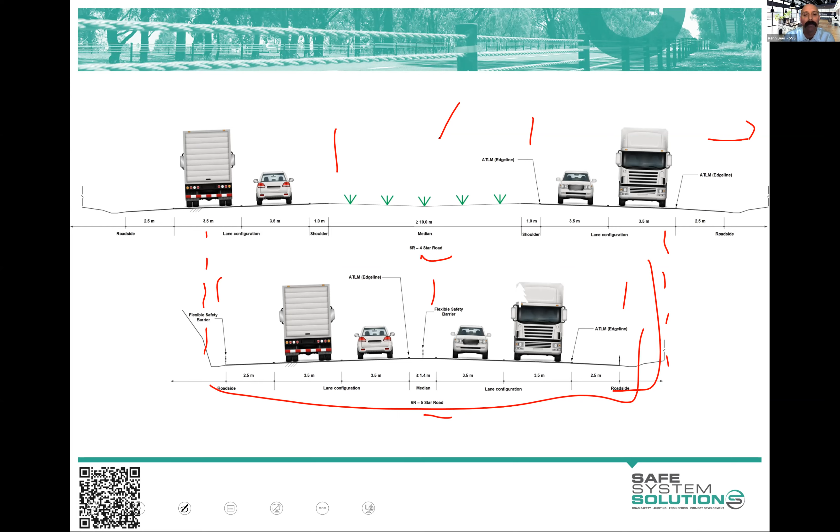Anyway, there's lots of those in there. I'm not going to run through those, and I probably won't run through this, because all I want to say is that you've got to be very careful when you're into the design. So in theory, yes, we want to go these long continuous barrier segments, but we've got to think about how they're used and some of the challenges. That will provide us a safer outcome. Obviously, the community will be very angry, or people will get very angry if they don't have an area to pull over and the like.

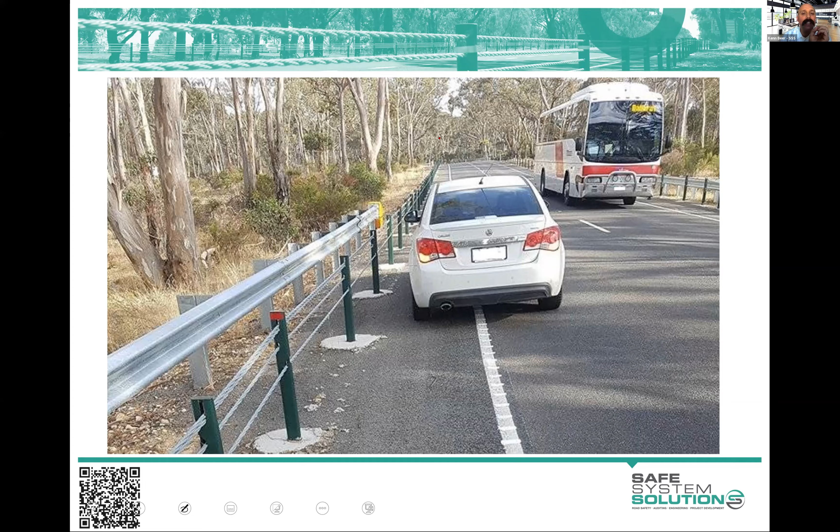It presents some risk in its own right as well. And a couple of slides just to finish on. It's not that I want to talk about a specific product as such, but I want to talk about the theory of managing energy and trying to manage absorption of energy. And this one is talking about a Raptor cushion, which is a specific product. I can't even remember who sells the product, but this is what a Raptor cushion looks like. And it sits around a power pole or any point source. So it could sit around a tree. I've never seen it sit around a tree, but in theory you could.

And what it does is it has a bit of cushioning, right? But its actual way to manage energy is when struck, it rotates. So a bit like they tell you in martial arts, you deflect the energy of the punch away from. Not that I've ever done martial arts in my life, but that's what they say in the movies. But so the idea is that if your vehicle is sliding, you hit it, and due to the design and the angle of it, it sort of rotates it and it moves the energy along and slows you down. And I just think it's a wonderful little bit of engineering to manage energy in these confined spaces. Barriers work better because they deflect you along, but this one you wouldn't have enough space for a barrier.

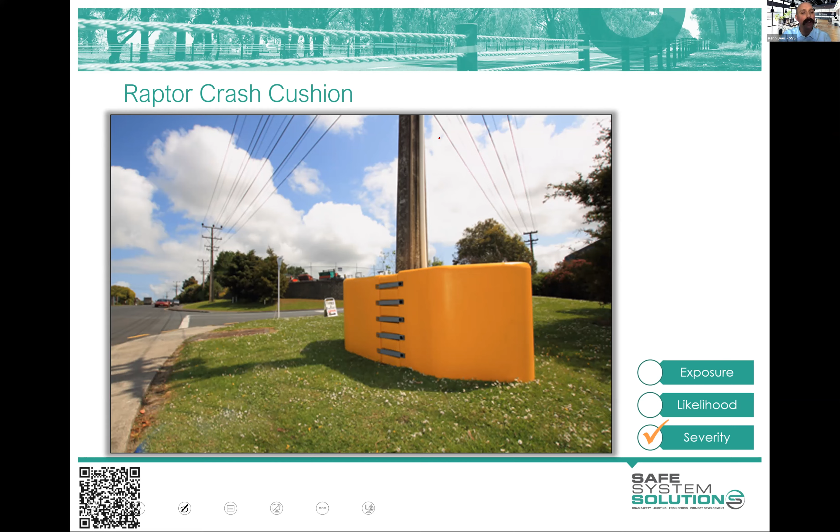And this is a forensic crash investigation of a Raptor cushion that was struck by a vehicle at about 92 kilometres an hour, they estimate. Old Ford, 4 male passengers, 2 in the morning. So mistakes were being made. And they were going high speed in a fairly urban area, and they left the road. They hit this power pole, which luckily had a Raptor on it. And they all had minor injuries. They went to hospital, but they are living normal, healthy lives and being productive in society now, assuming that they're being productive in society. But their mistake has not cost them their lives. And I think the forensic investigation report said that had that Raptor not been there, there would be death or high level serious injuries involved. So again, the innovation, the possibility we have out there.

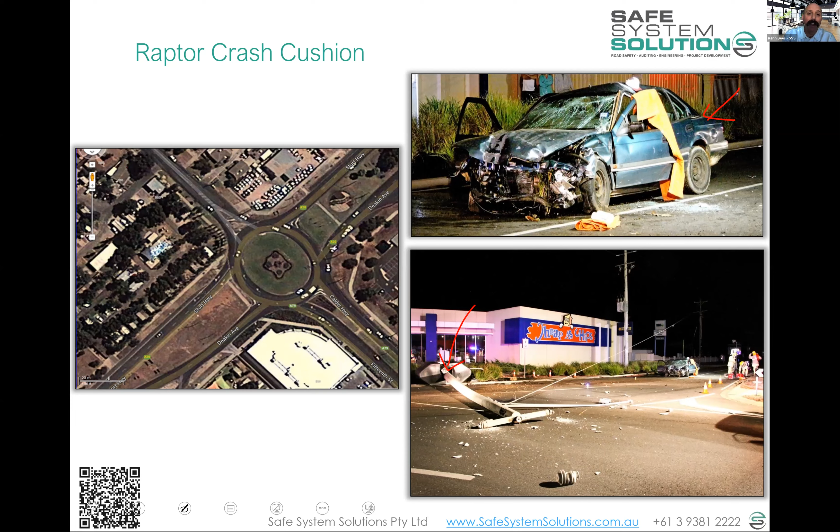I think, Kathy, it's probably an opportunity now for me to just answer any final questions and for you to show people where to go. There's a huge amount there. We could talk for days and days, in fact decades, on all of those topics because there's so much in there. I just wanted to touch on a few of the principles. Yes, you could talk for a long time, Ken. So a couple of questions.

Are there any Raptor type products available or in development for high speed roads? Yeah, so interestingly, Raptors are utilised in some jurisdictions up to 80 kilometres per hour. Some jurisdictions only accept them up to 60 kilometres per hour. So I think there is still big potential with that. There are a couple of short systems going through ASBAP, the Australian Safety Barrier Assessment Panel, at the moment, which are like barrier systems, almost like crash cushions on each side, but it's a specific product. So I think we're going to be seeing some more stuff, because it comes up so often that you've got a specific hazard and you don't have enough space either side, but it's a high-speed environment, and how to deal with that is such a challenge. So the big multinational barrier roadside product people are coming up with options.

Are there any alternative safety mechanisms in case wire rope barrier treatments fail, assuming you cannot apply any line treatments due to audible impact surrounding residences or run-out road widening due to the lack of road reserve? What would be a good alternative?

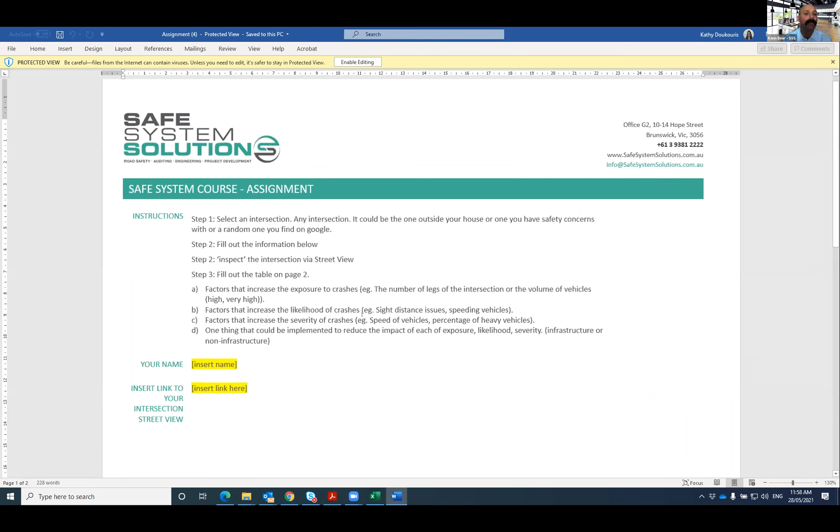So what you're going to do is, we've got the steps marked there, but the first thing you're going to do is think of an intersection. This could be any intersection you want - it could be the one outside the front of your house, the one you think about on holiday, or the intersection you hate most in your town, whatever it is.

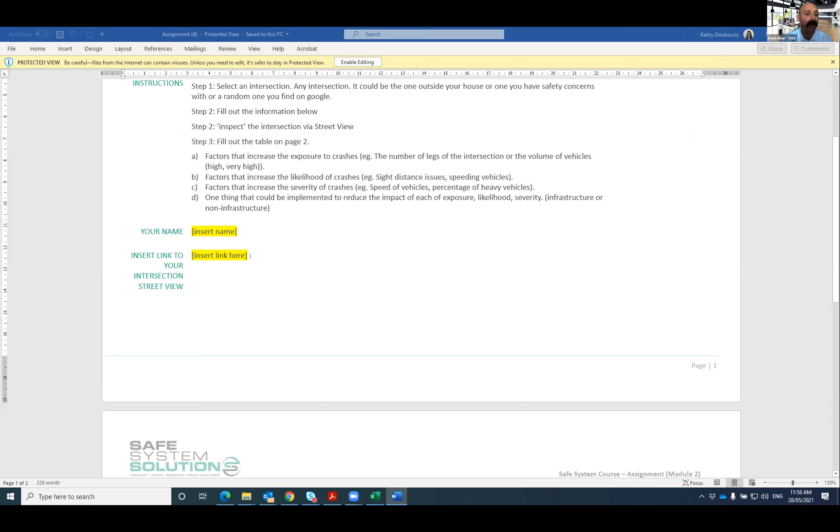Then you're going to fill out anything that's highlighted yellow. So first start with your name, then give us a link to that intersection, a Street View link, or maybe just write where the intersection is, so we can look it up on Street View and have a look at it ourselves when we go to mark it, and go down a bit further.

Then what we want you to do is put in between 1 and 3 factors that influence the exposure to crashes at that intersection as it is now. Remember, what we're talking about there are numbers - what is influencing the number of vehicles, the number of pedestrians crossing, the number of cyclists through there? It could be the number of legs, it could be the population, whatever it is.

Then we want you to go over to likelihood and say what are between 1 and 3 factors that influence the likelihood of crashes at this spot. That could be anything like what type of controls there are - is it stop, is it give way, what is the sight distance, what are the surface conditions, is there a see-through effect? All of these things, any of these things, between 1 and 3 of those factors.

And then we do the same for severity - what is influencing the severity of any crash that does occur? That's going to be speed, angles, the presence of vulnerable road users potentially - are they old pedestrians? It could be the percentage of heavy vehicles there; it can be more severe if a heavy vehicle's involved.

Then once you've done that, between 1 and 3, we just want one thing only that you could change which would alter the exposure - that could be ways to reduce the number of vehicles, pedestrians, cyclists, motorcyclists. Really, that one you're talking grade separation, blocking things off the line. For likelihood, anything you could do to lessen the chance that crashes are going to happen. And severity - when crashes happen, how do you make them less severe?

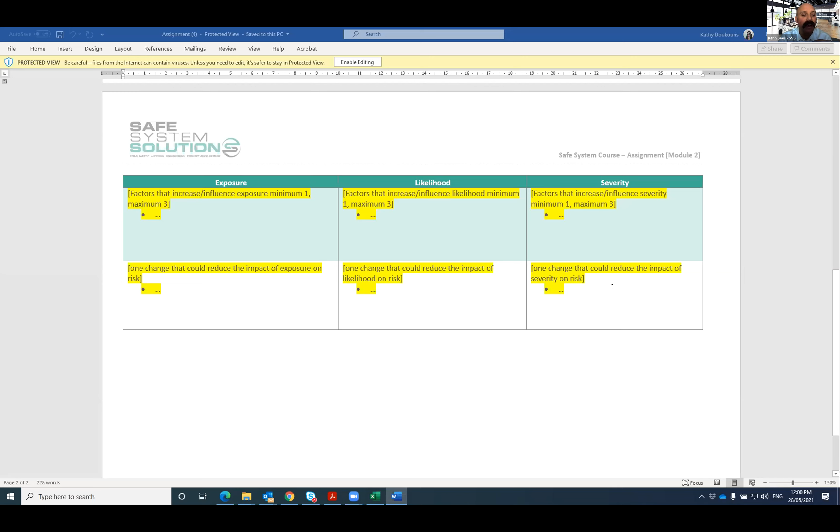And that's it, all right. You can do this for any intersection. A question came in - does it have to be Australia, New Zealand? No, I don't know, go to Brazil. I'm happy to look at an intersection in Brazil if you want. What is the exposure, the likelihood, the severity? What's influencing those, and what can we do to alter those? And this one, you've got free rein.

No budget limitations - we're marking you on the ability to categorize here, are those things that would influence exposure, likelihood, severity. And then you ideally PDF it and just submit it - upload it into Moodle. So save it onto your desktop somewhere and then upload it to Moodle, and then we'll mark it.

And then there are also some safe system assessment fact sheets, which you've also got a hard copy of, but these might help you working out exposure, likelihood and severity as well. Hopefully this will only take you 10, 15 minutes at most, because you can just whip through it at your desk, Street View, no worries.